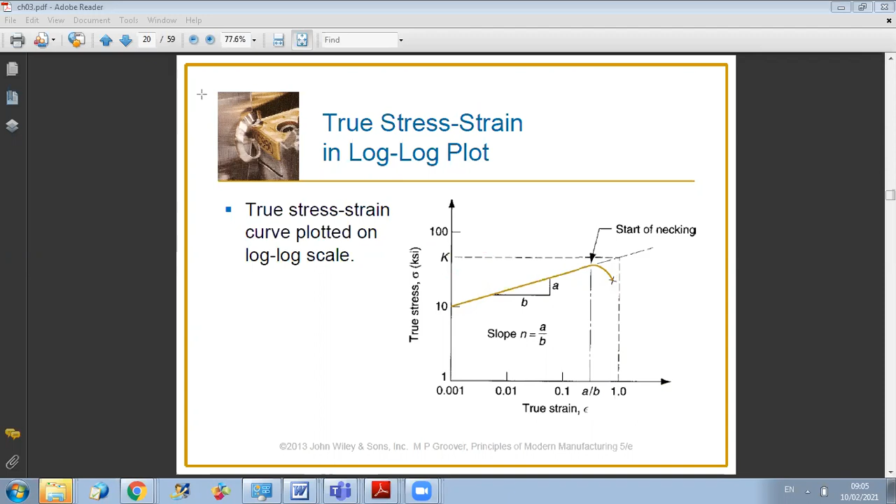So this is a first method to find the value of k and n. If you want another method without drawing the log-log curve, go back to the true stress-strain curve and take two points in the strain hardening zone. Pay attention to have these two points between the elastic limit and the start of necking, so that the points belong to the required zone, the strain hardening zone.

Then I can read the corresponding values of true strain and true stress for each point. Since these points should satisfy the equation of the flow curve, sigma equal k epsilon to the n, we can write two equations with two unknowns, which are k and n. We will do this together in practice problems to see how to apply it.

Just know this idea: I have two graphical methods to find k and n. I work on the true stress-strain curve with the normal scale, take two points, and apply the equation sigma equal k epsilon to the n on each point to get two equations with two unknowns, k and n. The second possibility is to draw the log-log graph, and from the linear variation get the slope equal to n, and to get k, it corresponds to epsilon true equal to 1.

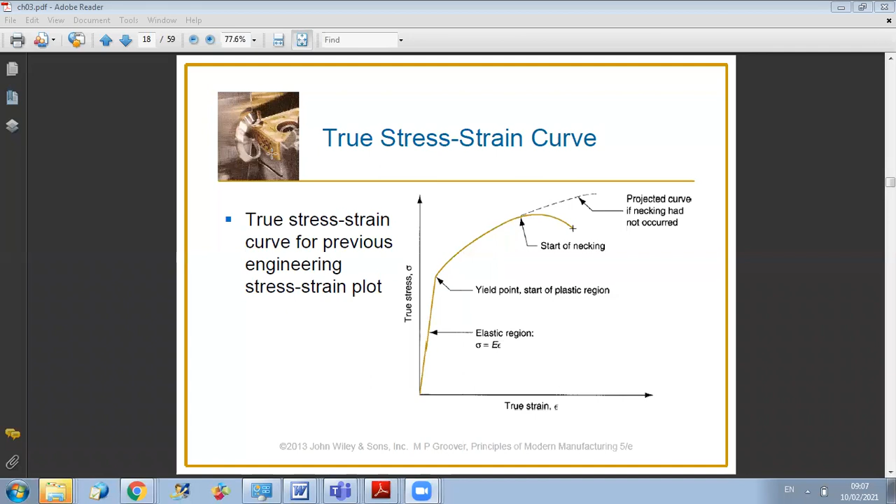So because in the log-log plot the strain hardening zone follows a straight line, the relationship between true stress and true strain in the plastic region can be computed as sigma equal k times epsilon to the power n, where k is the strength coefficient and n is the strain hardening exponent. Any question until here?

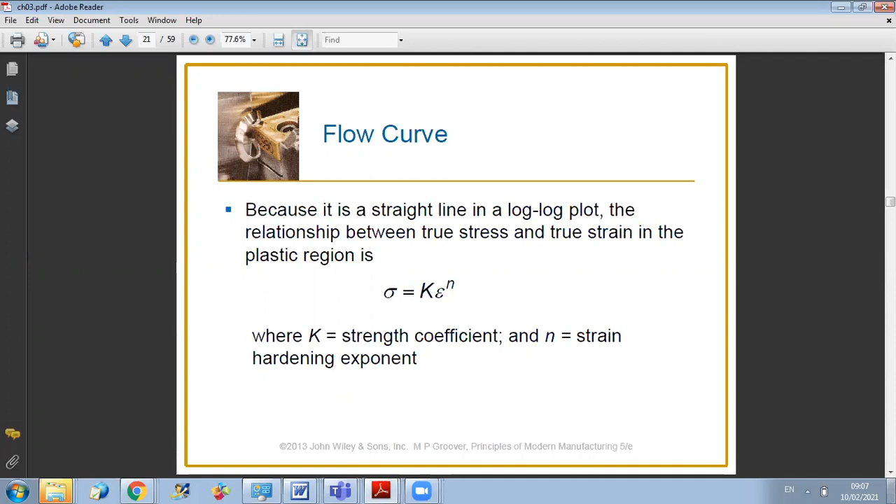Now we will see the different categories of stress-strain relationships. The first category is the perfectly elastic scenario. In this case, the behavior of the material is defined completely by the modulus of elasticity, because this material will not undergo any plastic deformation. It will have rupture before entering the plastic region. This is in general the property of brittle materials, since fracture takes place instead of yield. So we don't have a yield point and we don't have a plastic region, only an elastic region. This behavior is common for brittle materials such as ceramics, many cast irons, and thermosetting polymers.

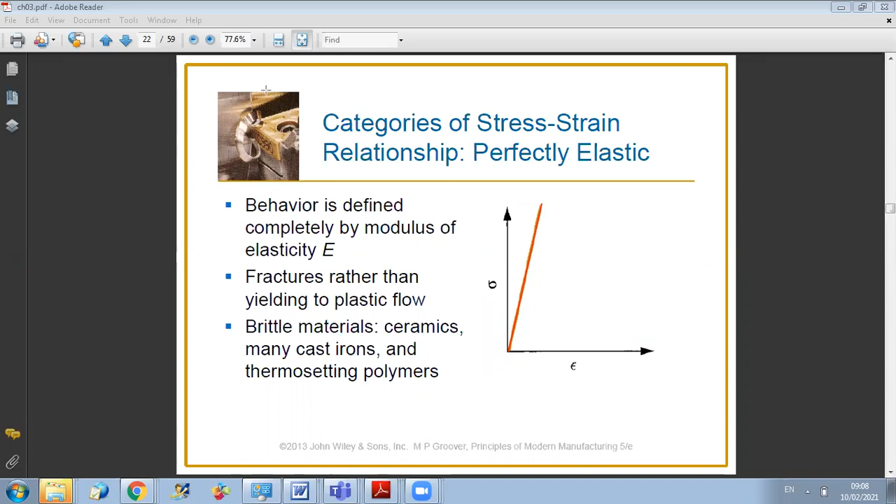Now the second type of stress-strain relationship is elastic and perfectly plastic. This material, if we put stress on it, will undergo two phases, elastic and plastic. But what is particular for the plastic region is that once it yields, it will not require any additional stress to strain. This means once I reach the yield point, without increasing the stress any more, I can reach a very high deformation. So this is a perfectly plastic behavior.

In this case, for the first region, I need the modulus of elasticity to define it. Once the yield point is reached, the flow curve is a particular case of the flow curve, because in general the flow curve is of the form sigma equals k times epsilon to the power n.

So we have here, in this particular case, what will happen is that the stress will remain constant in the strain hardening zone. So it's not anymore called strain hardening, it's perfectly plastic because sigma is not increasing. We say it's strain hardening when sigma is increasing to continue the deformation. So here, since sigma is constant, the value of n should be 0.

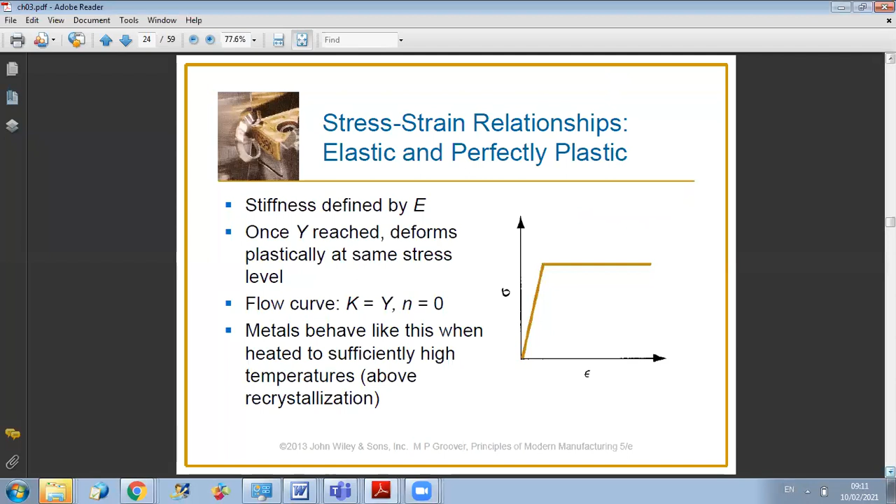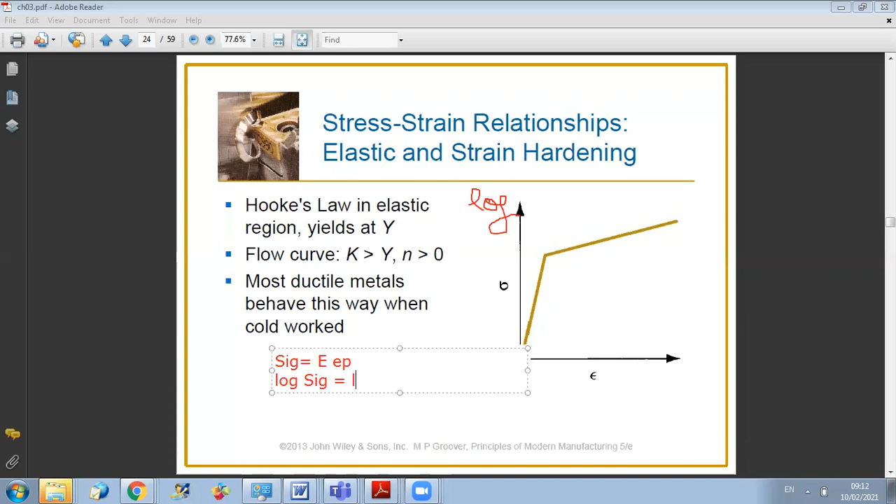But what is particular for the elastic region is sigma equals the modulus of elasticity E times epsilon. So if you apply log on it, what do you have? Log of sigma is equal to... you know that log of A times B is log of A plus log of B, so it's log of E plus log of epsilon. So you can see here that for the elastic region, it's a particular case of the equation of strain hardening because n will be equal to 1.

So for this characteristic, n is equal to 1, and in this case, if you want to find the corresponding value of k, k will be equal to the elasticity modulus. So this is the elastic region, a particular form of k epsilon n, where n is 1 and k is E. This is why in a log-log plot it's also a linear variation, but you can see the difference in the slope.

Because when you move from the elastic to the plastic region, what will happen to the slope? It will decrease, because as we have seen last time, it will be easier to deform when I reach the plastic region.

Any question on this? This behavior is the case for most ductile metals when they are cold worked. So we will see in manufacturing processes, we have cold worked processes and we have hot worked processes. It's very important to know these characteristics to know how to deal with materials when we are doing a manufacturing process at low temperature, and how their behavior will be if we heat them to a sufficiently high temperature.

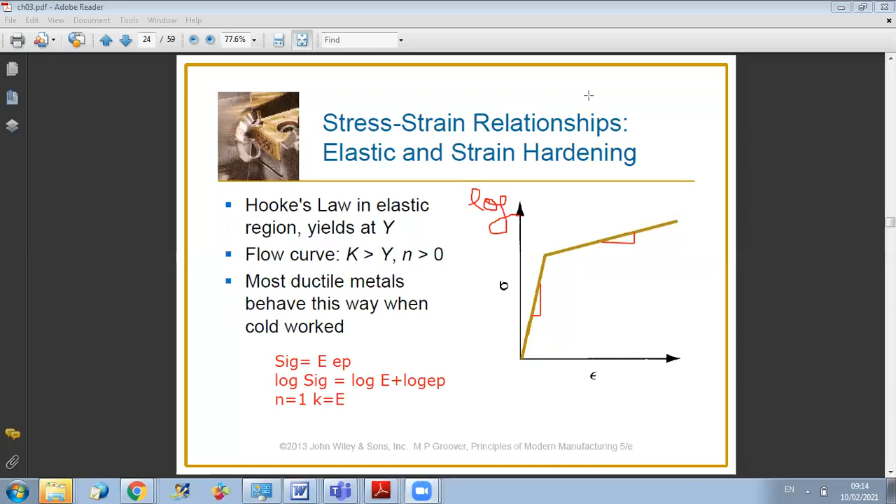Now, we have seen together tensile tests, and now we will go over compression tests. We will see that we can nearly draw conclusions from compression tests like tension tests, and sometimes we can use the same data, as we will see together.

Compression consists of applying a load that squeezes the ends of a cylindrical specimen between two plates. The compression force applied to the test piece will result in a change in height and diameter. So here it is the opposite of tension: instead of having elongation, you will have reduction of the length of the specimen, and instead of having area reduction, you will have area increase.

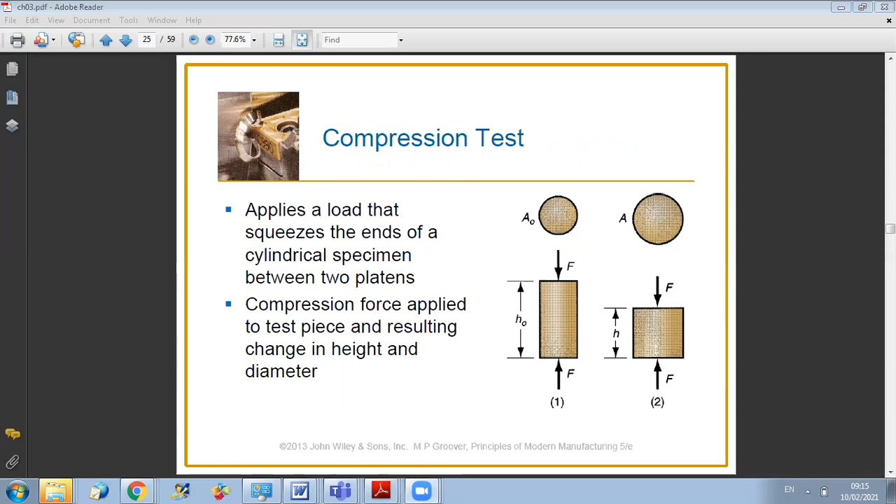Now, let us see the graphs, the engineering graph and the true graph. Just before this is the compression setup. It is the same setup, but the difference is that instead of moving the lower plate to cause elongation, you move the upper one downward, and this will cause the compression of your specimen.

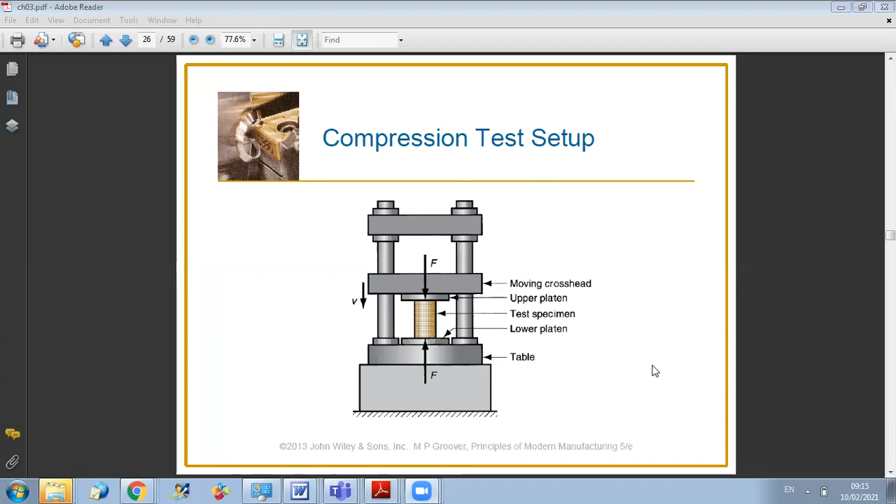For the definition of engineering stress, it's like the case in tension, just here it's a negative value. So sigma equals minus F over A0. But if you put sigma compression, sigma C, no need for the sign, because once you put compression, you know you are compressing your specimen, so you just put the absolute value. But if you just put sigma, you should put the negative sign, minus F over A0. This is the definition of engineering stress, like we did for the tensile test.

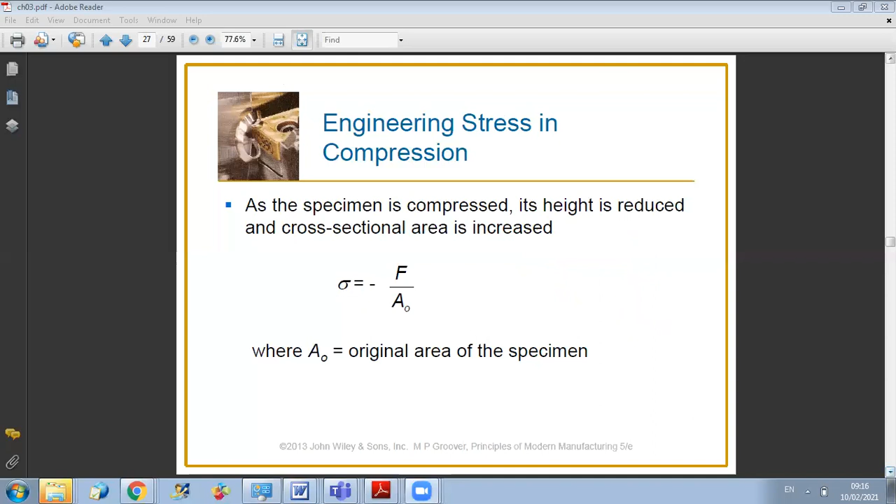We also have a definition for the strain, which will also be negative, because engineering strain is final height minus initial height over initial height, and we know that in compression the height is reduced. This is why the engineering strain will be negative. Since height is reduced during compression, the value of E is negative, but the negative sign is usually ignored when expressing compression strain. So when we say EC, we just put the absolute value.

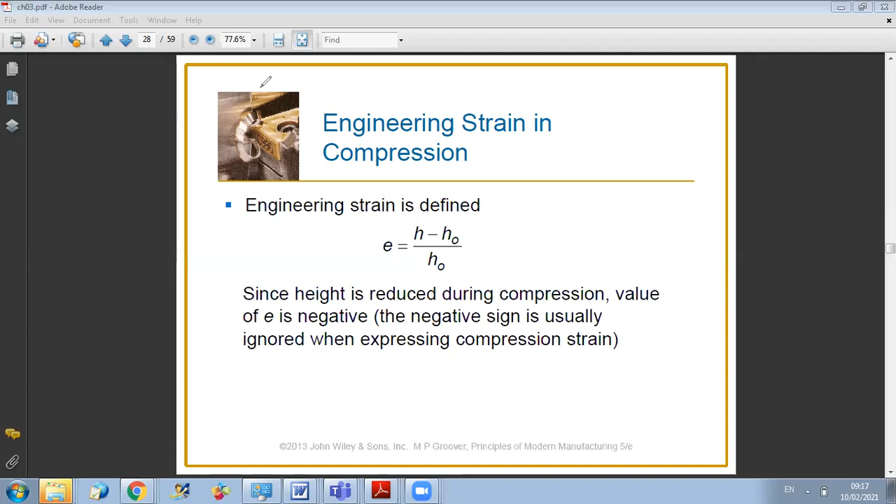Now let us look together at the engineering curve. It's clear that the engineering curve in compression is quite different from the case in a tensile test. Why is it different? The engineering curve represents the variation of the load F. When we do a compression test, since the area is always increasing during the test, the force needed to continue to increase the strain will be higher.

This is why we don't have in the plastic region the reduction behavior we see in the tensile test, where there is a necking part. Here we don't have a necking part in compression - necking is only a property of tension. Plus, since the area is increasing, we need a higher force to cause this, so the force is continuously increasing. It will not decrease at any stage since there is no necking behavior. This is why the engineering curve is quite different from the tensile curve.

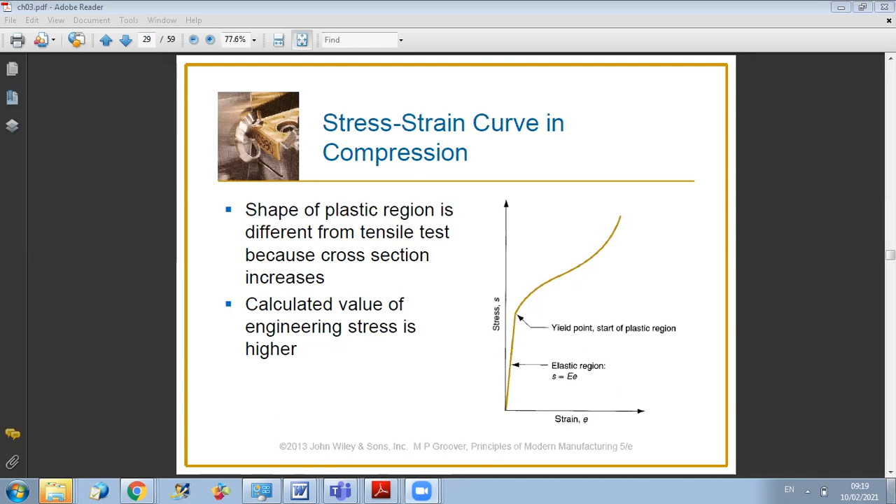Although differences exist between engineering stress-strain curves in tension and compression, the true stress-strain relationships are nearly the same. And since tensile test results are more common, flow curve values K and N can be deduced from tensile test data and applied to compression operations. When using tensile K and N for compression, we should ignore necking - we don't have necking in compression. This is the only difference in the true curve, which is a phenomenon particular to tensile tests.

So as I told you, the behavior of the engineering curve is different because of the variation in area. The variation in area in tensile test is a reduction, while in compression test it's an increase in area. This is why the variation of F is different. But the variation of stress, when you divide F by the actual area of the specimen, gives close behavior in tensile and compression tests. This is why you can generalize results from tensile tests to compression tests. This is feasible, especially when we talk about ductile materials, not brittle ones.

Sometimes we will not go into these tiny details, but if you have taken mechanics of materials, you know that some materials are weaker in tension than compression - this is the case of brittle material, for example. In this case, the true curves in tension will be different than in compression. But in general, for ductile material, the behavior will be the same in tension and compression.

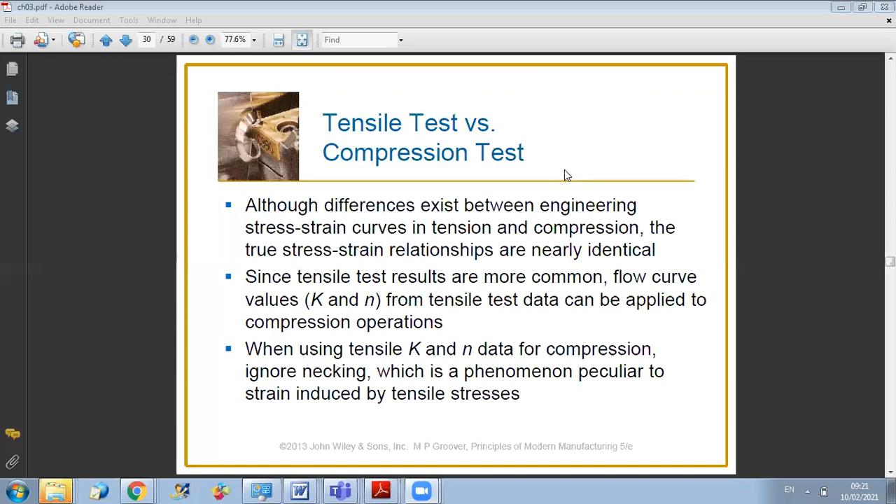Now, what about testing of brittle materials? Brittle materials are difficult to test in tension because they can easily reach the rupture state. This is why, in general, when we have brittle materials like ceramics, we do a different type of testing, since they possess elasticity but little or no plasticity. So conventional tensile tests are not easily applied.

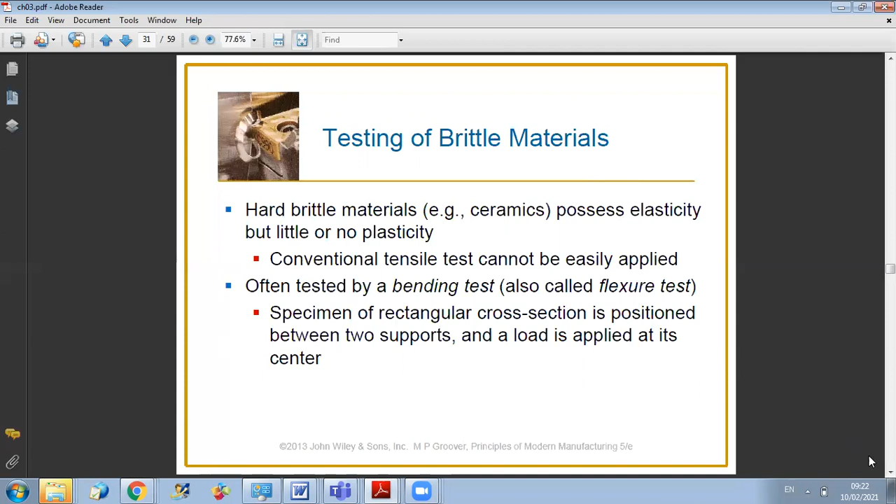This is why we replace the tensile tests by bending tests, also called flexure tests. It consists of a specimen of rectangular cross-section positioned between two supports, and the load is applied at the center of the section. Let us see here.

So you have here a rectangular cross-section supported at the two sides. We apply at its middle a force F. If you have taken the statics course, you know that this force can lead to deflection of the beam or of the rectangular cross section, and also it will cause compressive stresses from the upper side and tension stresses from the lower side.

So the bending test also causes compression and tension, and this is why this test can be used to know the behavior of a specimen in tension. We will continue to increase the force until rupture, and in this way we can know the behavior of the brittle material.

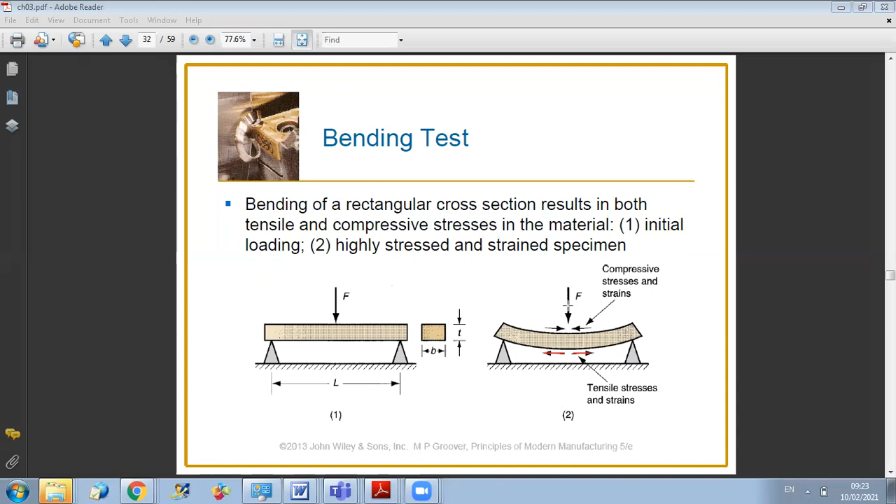So for testing of brittle materials, since they deform elastically until fracture, failure will occur because tensile strengths of the outer fiber of the specimen are exceeded. By performing this test, we can calculate the maximum possible tensile strength of these materials.

And in general, for these materials, the failure type is called cleavage, which is common with ceramics and metals at low temperature, in which separation rather than slip occurs along certain crystallographic planes. So we will have separation along fibers of the materials that are subjected to tension. Any question until here?

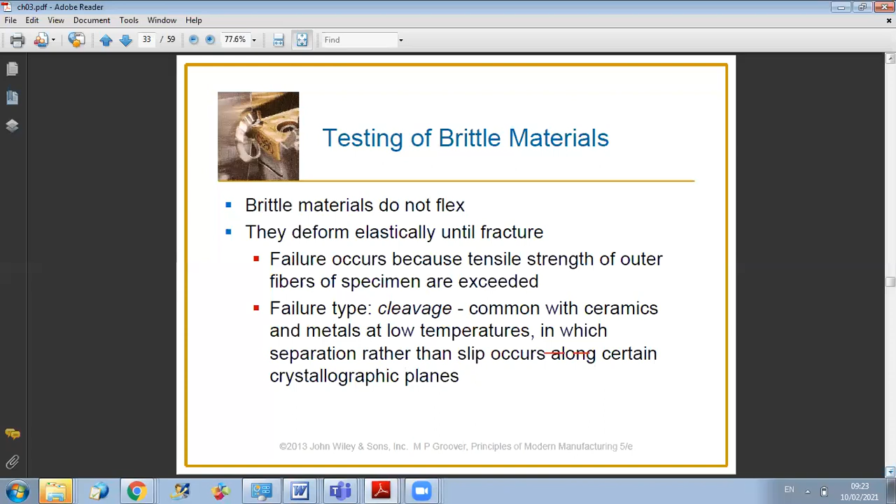Now, another behavior that is important for materials is the shear behavior, and we need to know what are the shear properties of a material. A shear test consists of application of stresses in opposite directions on either side of a thin element. So we can see here in the figure, if I have this element and I apply forces in opposite directions, the element will be subjected to shear.

And under shear, we will have deformation. Here, the deformation type is change in angles. So you can see here that initially the angles are 90 degrees, for example. Due to shear effect, we will have a variation in angles. So we can define the shear strain as the tangent of this angle, which is delta over b. This is a way of defining the shear strain.

And of course, for the shear stress, it is defined as the force applied over the cross-sectional area. So here, if I draw it in 3D, this will be the area subjected to shear. So to find the shear stress, I should divide F by A. And the shear strain is defined as delta, which is the displacement along the force action, over the distance separating the two forces in the perpendicular direction.

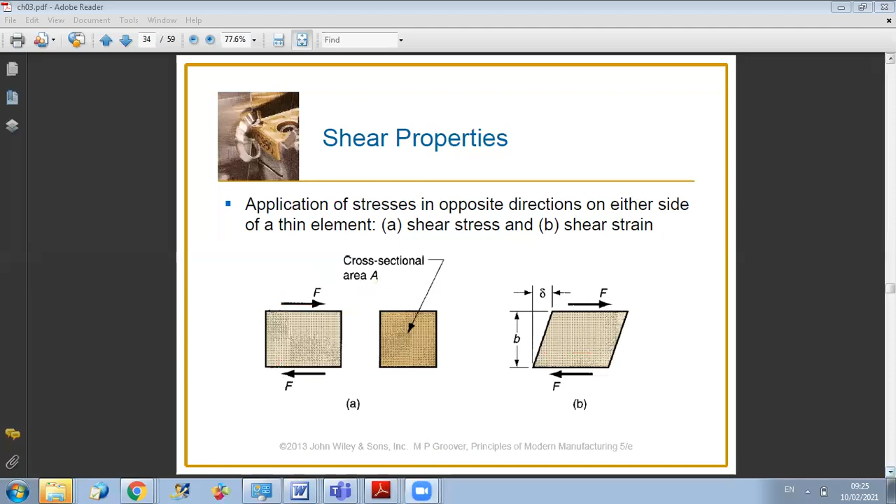So shear stress is defined as tau equal F over A, where F is the applied force and A is the area over which deflection will take place. The shear strain is defined as delta over B, where delta is the deflection of the element and B is the distance over which deflection occurs.

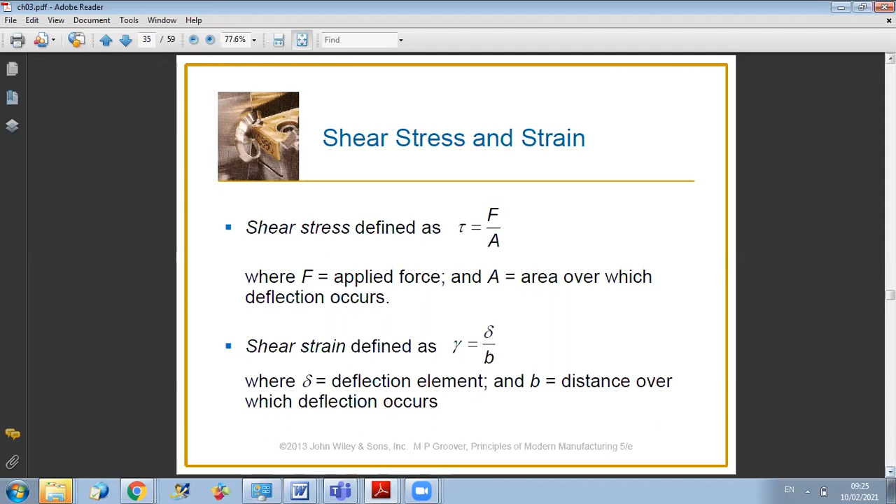Now, concerning the torsion stress strain curve, a typical shear stress strain curve can be obtained from a torsion test. In this case, we will have the variation of shear stress with shear strain. And as you can see here, we can also define two regions: an elastic region first, a yield point, and a plastic region, but of course no necking zone here.

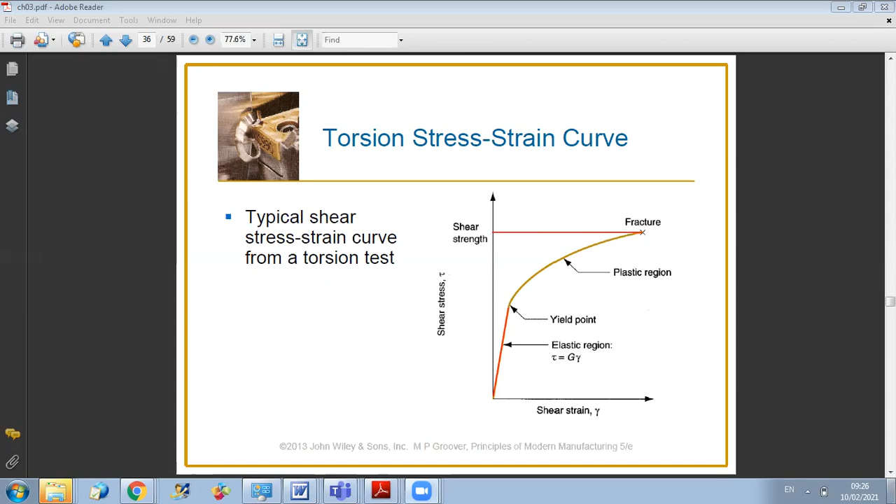We have fracture at a certain point, and at fracture, the shear stress corresponding is called the shear strength. Now, to define these regions, in the elastic region we can define a relationship just like in tensile tests.

So the shear stress is equal to G times the shear strain gamma, where gamma is the shear strain and G is the shear modulus. So instead of the elasticity modulus, we have the shear modulus G, and we have a linear relationship between the shear stress tau and the shear strain gamma.

Now, doing experimentation, we have been able to set a relation between the shear modulus G and elastic modulus E. We have observed that for most materials, we have the following relation between the two: G is equal to 0.4 times E. So if they gave you one of these two and you want to find the other, it's fine to use this relation, okay?

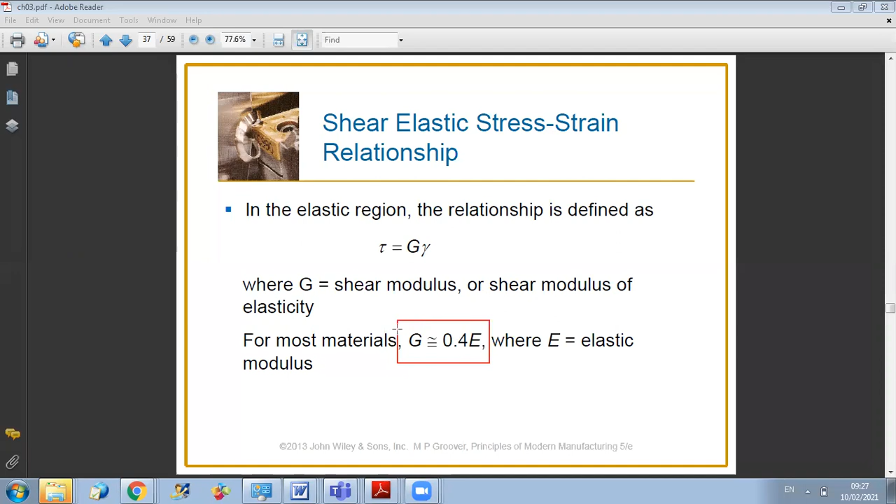Now, the relationship is similar to the flow curve for a tensile test. So as we have seen, you have an elastic and a plastic region, but no necking zone. So the shear stress at fracture corresponds to the shear strength. And also we have found a relation between the shear strength and the tensile strength, so we can relate properties. So if I know the tensile strength from a tensile test, I can deduce the shear strength by this relation.

Which is that the shear strength is equal to 0.7 times the tensile strength. Now, since in torsion processes we don't have variation in cross-sectional area, the cross-sectional area is nearly constant in a torsion test. So there's no need to have engineering and true curves, because engineering and true curves differ due to variation of cross-sectional area. But in torsion we don't have this, since we don't have a change in cross-sectional area. So we just can say that the engineering stress-strain curve for shear is the same as the true stress-strain curve for shear.

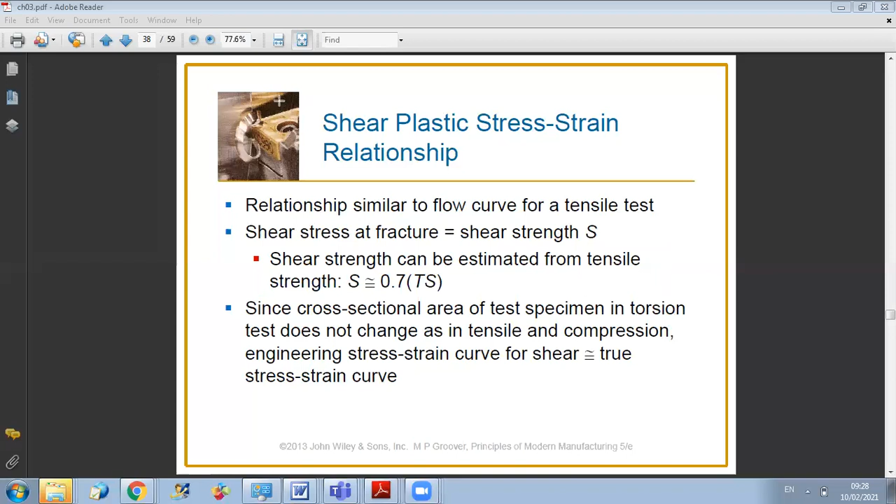Now, another important property of material is hardness. The hardness represents the resistance to permanent indentation. So let's say you are applying a certain load on a specimen, and then you remove this load. Indentation is a mark, so we will see it now in an example. If you press a ball on a certain specimen, it will tend to cause a certain indentation. Higher the permanent indentation, lower will be the hardness.

So good hardness in general means that the material is resistant to scratching and wear, and it is a very important property for the tools that we use in manufacturing, because these tools will be in contact with the object to deform, and to use it for a long period of time, it should have high hardness to resist scratching and wear.

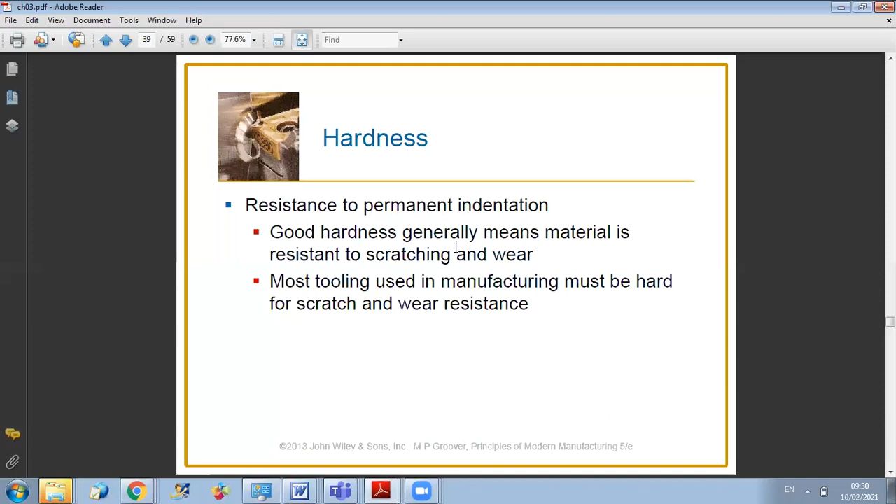Now, concerning hardness tests, we have several tests for hardness, and they are commonly used for assessing material properties because they are quick and convenient. We have a variety of testing methods that are appropriate due to differences in hardness among different materials. In this course, we will go over mainly the two most well-known hardness tests, which are Brinell and Rockwell. We have other methods such as Vickers, Knoop, scleroscope, and durometer, but you don't have to know the differences between them. Let us see how these tests are performed.

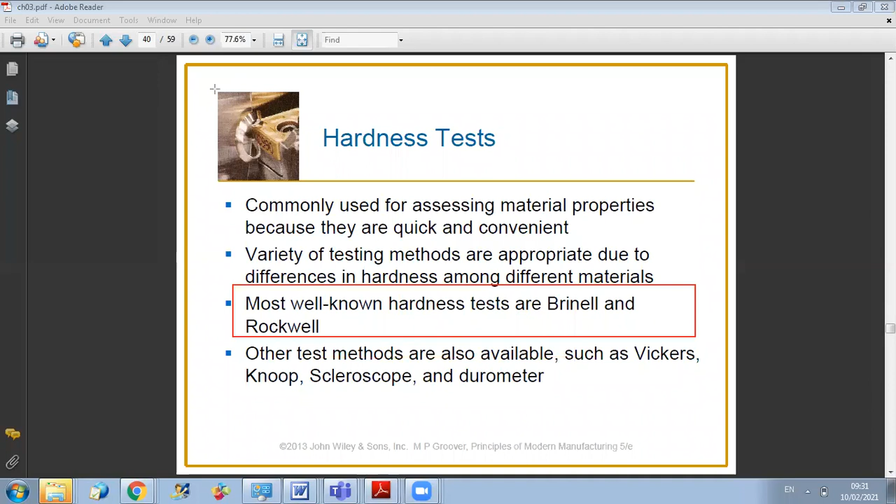To start with, we have the Brinell hardness test. What is the idea of this test? This test is widely used for testing metals and non-metals of low to medium hardness. Each test will be typical of a certain material, this is why you have a high variety of tests, because each material will have a suitable test for it.

For the Brinell hardness test, we use it for metals and non-metals with low or medium hardness. In this test, a hard ball is pressed into a specimen surface with a load of 500, 1500, or 3000 kilograms. Under the effect of this force, we will have a certain indentation shape in the specimen, and the indentation shape will have a circular cross section. By measuring this circular cross section, we can come up with a relationship.

I will give you the relationship in a sheet, and we will practice on it with examples. In the slides, they didn't include these formulas, but I prepared a sheet for you so you know how to use it in the exam. You don't have to remember anything. I will send you the formula sheet, and we will do examples on it together.

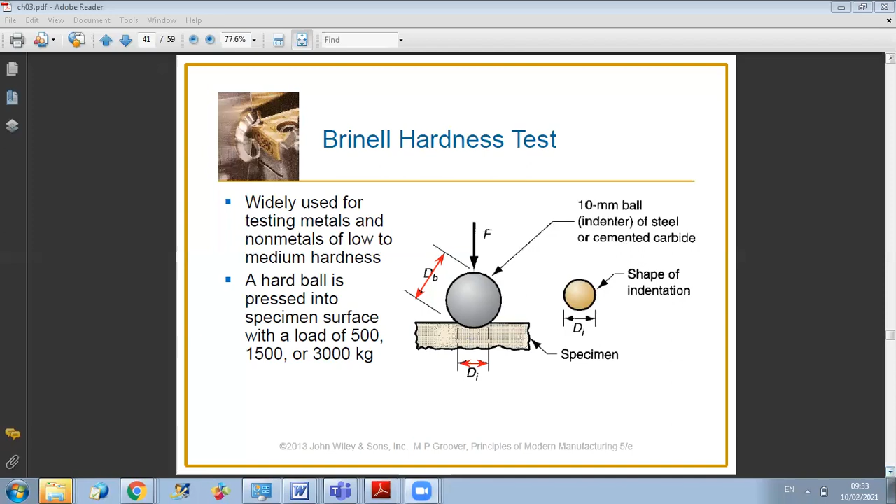Now, the second type of test is the Rockwell hardness test. It is another widely used test. A cone-shaped indenter is pressed into a specimen using a minor load of 10 kilograms, thus seating the indenter in the material. Then a major load, much higher than 10 kilograms, for example 150 kilograms, is applied, which causes the indenter to penetrate beyond its initial position. This additional penetration distance is converted into a Rockwell hardness reading by the testing machine.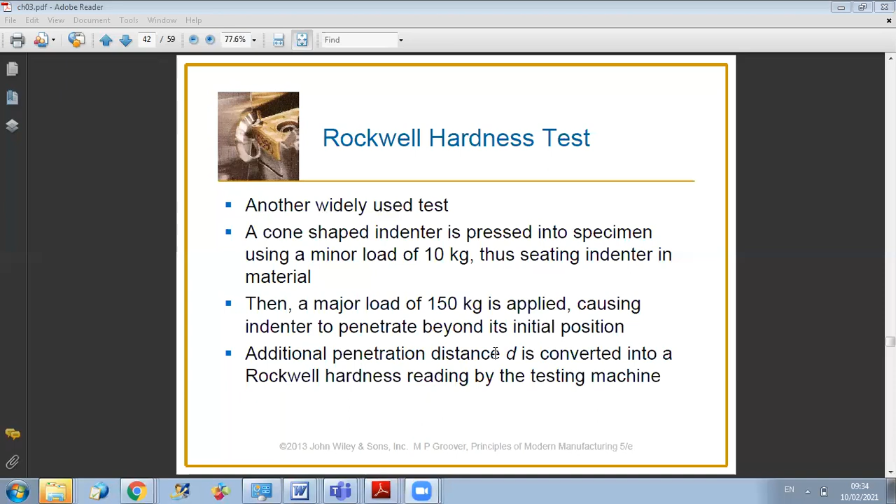So if you want, it's like a scale we come up with to measure hardness, which is in relation with the distance of penetration, because the higher the penetration distance, the lower the hardness.

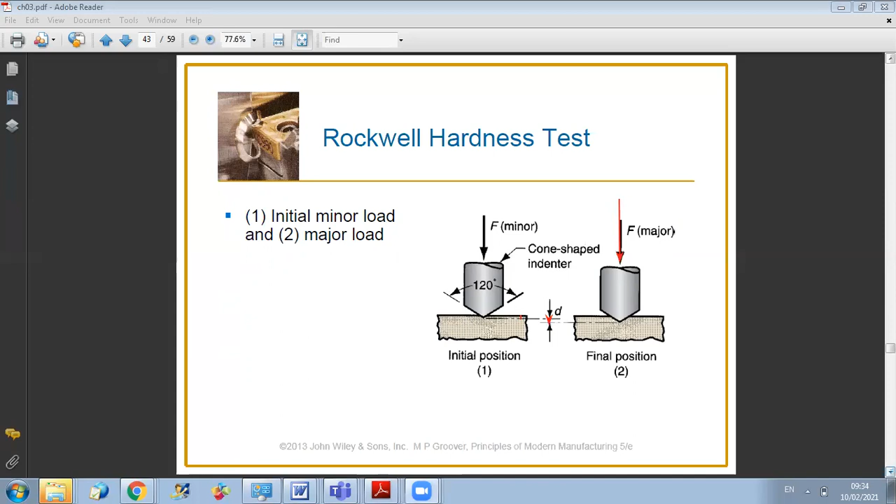Now, as we have seen before, temperature has a very important effect on material properties. In general, with increases in temperature we have an increase in ductility, so the material can deform plastically more, reaching higher strains and higher percentage of elongation. On the other hand, the yield strength and tensile strength are reduced. We have the advantage of increased ductility, and sometimes the decrease of tensile strength is an advantage because the deformation process becomes easier, but it is not an advantage for the final product. So we see that this has positive and negative effects.

Decreasing the strength of the material will have a positive effect on the manufacturing process, which becomes easier because we need to apply smaller loads to cause the deformation. On the other hand, for the final product, we generally desire a certain tensile strength. This is why we need a compromise between the final properties and the manufacturing process we are using.

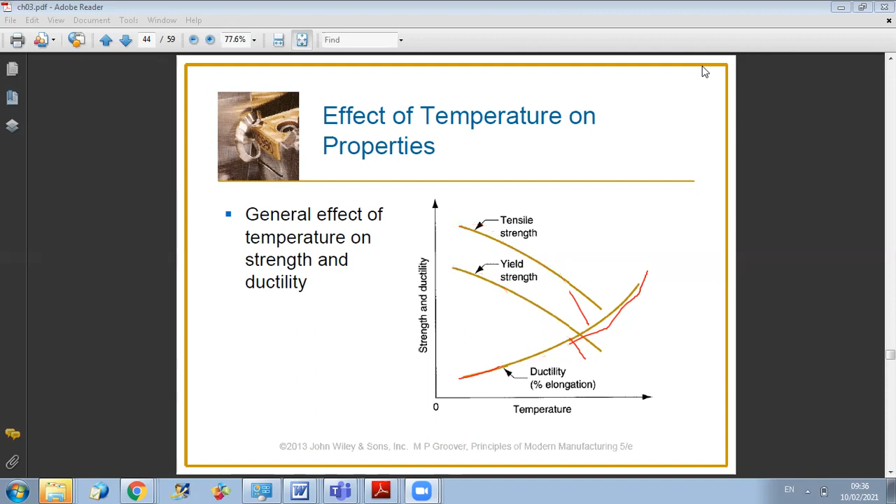Now, what about the hardness? How is hardness affected by temperature? As expected, hardness is reduced with temperature. But some materials have a smaller slope of reduction than others. For example, ceramic is hard, and even at high temperature it maintains an acceptable hardness. So if you need a final product with high hardness, one possible material is ceramic, because it can maintain high hardness even at very high temperatures. On the other hand, for steel with low carbon content, the slope of decrease of hardness is very high with temperature.

So as temperature increases, the hardness is reduced dramatically. So you can reach a very low hardness at high temperature.

We also have alloys of steel, and by implementing other components to steel, you can reach much higher hardness. This is the importance of creating alloys, or combining several materials together, because you can play with the properties in this way.

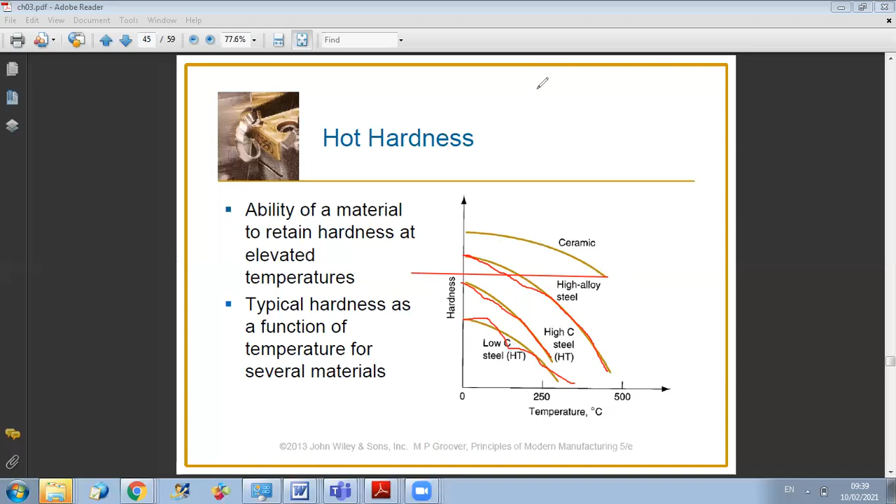Now we said we will define the recrystallization process. What is the recrystallization process? We know that most metals strain harden at room temperature according to a certain flow curve with n positive.

If you remember, when we saw the different behaviors, we saw that when a certain metal is manufactured at cold temperature, if we draw its stress strain curve, we will have a flow curve characterized by sigma equal to k epsilon to the power n.

However, if we heat to a sufficiently high temperature, the behavior will become perfectly plastic. This means n will become equal to 0. So once we reach yield, we don't need to increase the stress any more to strain the material. This process is possible by reaching the recrystallization temperature.

Now what do we mean by this? If we heat sufficiently to a high temperature, strain hardening will not occur, because new grains will form that are free of strain, so they can strain easily without needing to increase the stress. This is called the recrystallization process.

Whenever we heat to a certain temperature, we will start to see in the metal grain formation of small grains, and these small grains will allow easy deformation because they can slide easily with respect to each other.

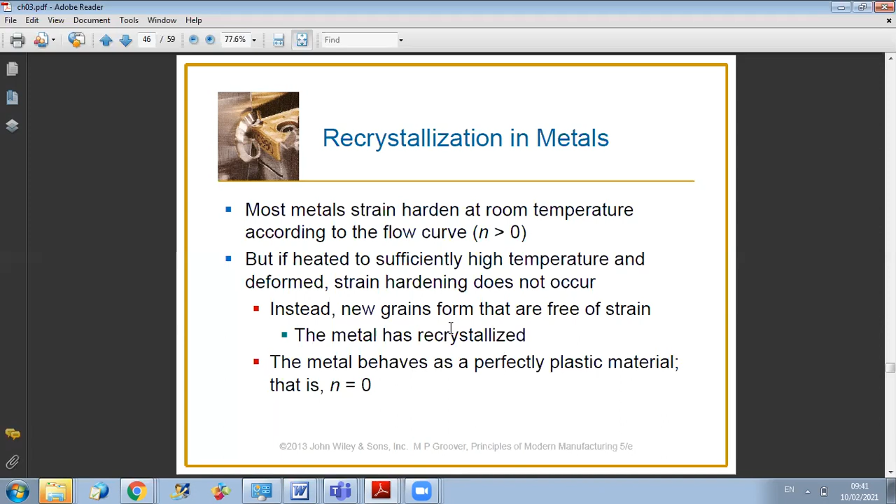Now what is the definition of recrystallization temperature? Recrystallization temperature of a given metal is about half of its melting point, measured on an absolute temperature scale. So in general, we reach recrystallization temperature before melting, half of melting.

Because we are still in the solid state, but we will have formation of grains that are not very attracted in a solid way, as is the case for cold temperature. So in this case, it will be easier to deform the material.

Now, recrystallization process takes time. This is why we decided on a definition of recrystallization temperature, specified as the temperature at which new grains are formed in about 1 hour. So we should wait 1 hour before starting to see the formation of grains.

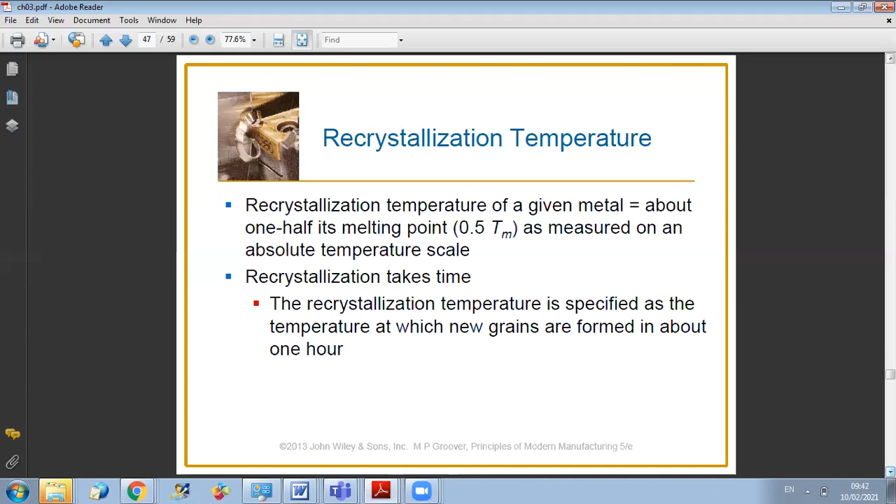Now, what about fluid properties that are desired in manufacture? We know that fluid behavior is desired in many manufacturing processes. Why? Because fluids can take the shape of the containers that hold them, and many manufacturing processes are accomplished on materials converted from solid to liquid by heat.

For example, this is the case of casting. These processes are called solidification processes, and we will see these processes in detail in the coming chapters. Many examples of solidification processes are given here: we have metals that are cast in molten state, glass that is formed in a heated and fluid state, and the majority of polymers are shaped as fluids.